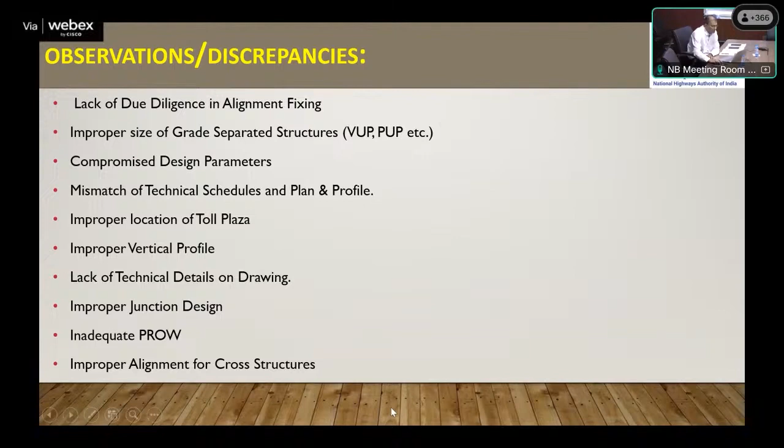Then improper alignments for cross structures. The cross structures which are being proposed are not at the desired or advantageous location. Sometimes they are proposed slightly away at some other location as per the convenience of designing or planning, or due to some other reason. So then the purpose gets a little bit defeated in terms of flow of traffic, flow of water, or even the other utility which may be there for the structure.

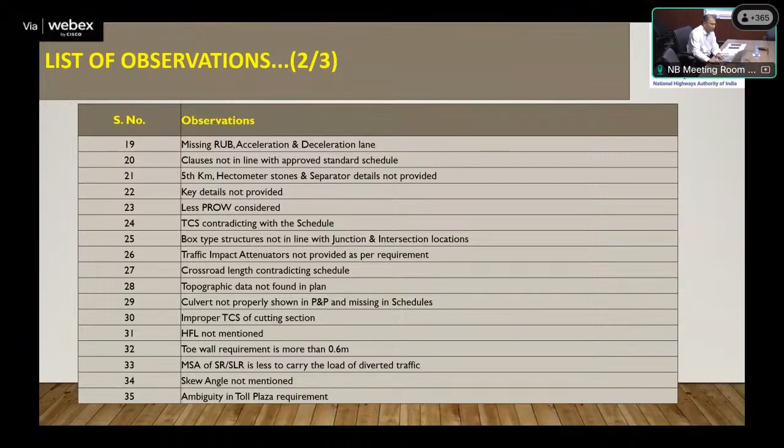So these are the various types of observations which we have already categorized into broader classifications. I will not go into this one by one. Instead, I will try to illustrate it with the help of images, documents and other things in pictorial or illustrative way, so that it will be better for your appreciation.

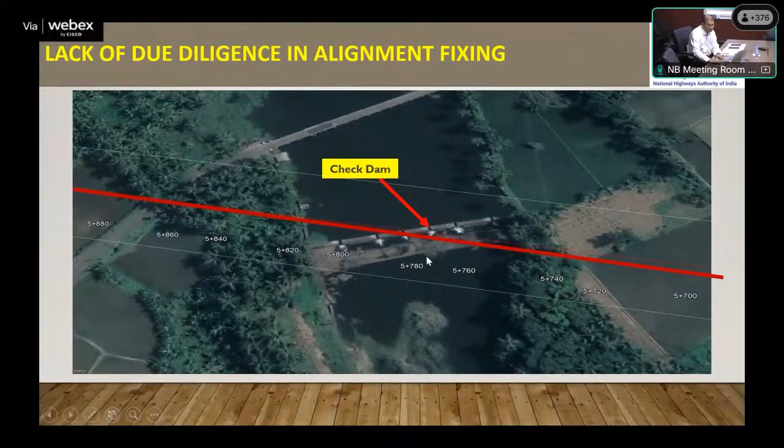This is entirely a casual approach of fixing the alignment, and the same is shown here in the drawing. This is the check dam, and it was very much in the knowledge of the planning DPR consultant. What he has done is taken this arrangement of the pier as a portal pier, with this isolated foundation.

They have split the foundation to protect or avoid the structure, but this may not be sufficient because the structure is of concrete and may be having a larger bottom width. So it may not be sufficient. This distance may not be sufficient to take care of the foundation and other existing details of the structure, and without damaging or causing interference to the existing structure, it may not be possible to execute the proposed structure.

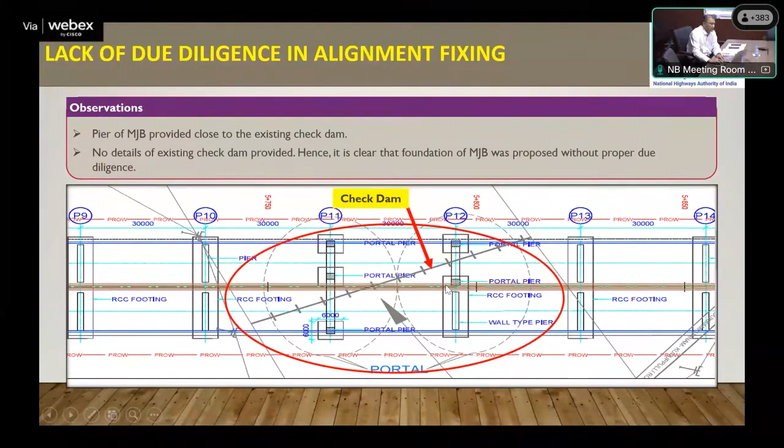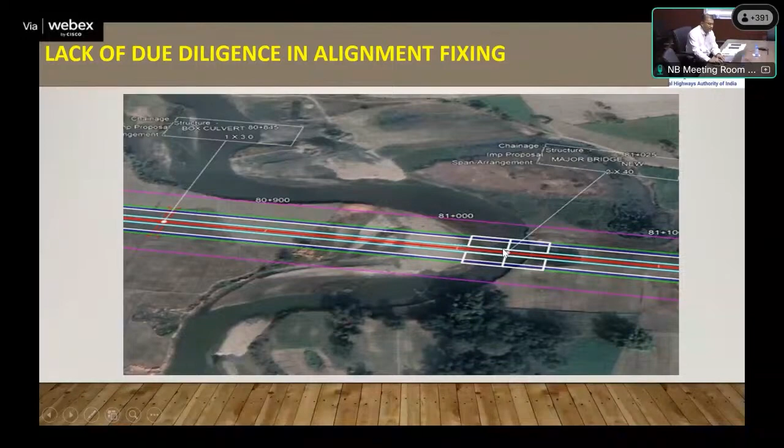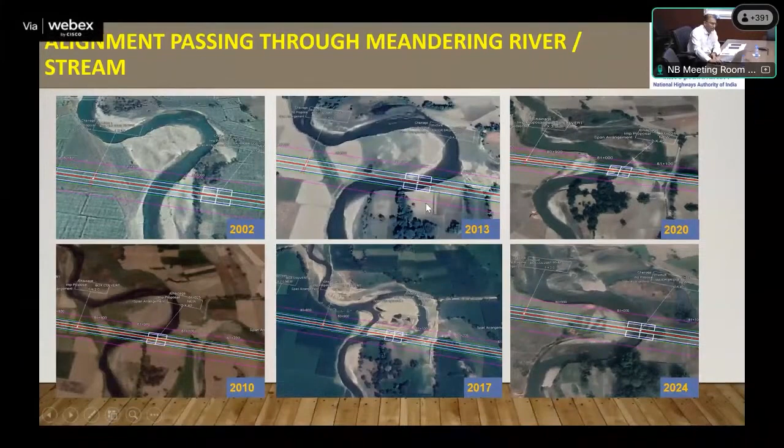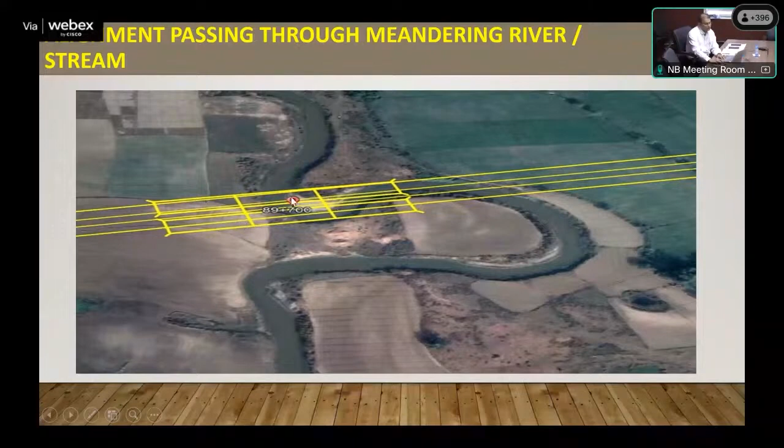So if we are constructing a bridge here, the river course will go on changing and it will get shifted. So the bridge at this location may not be adequate, desirable or sufficient to take care of the waterway requirements.

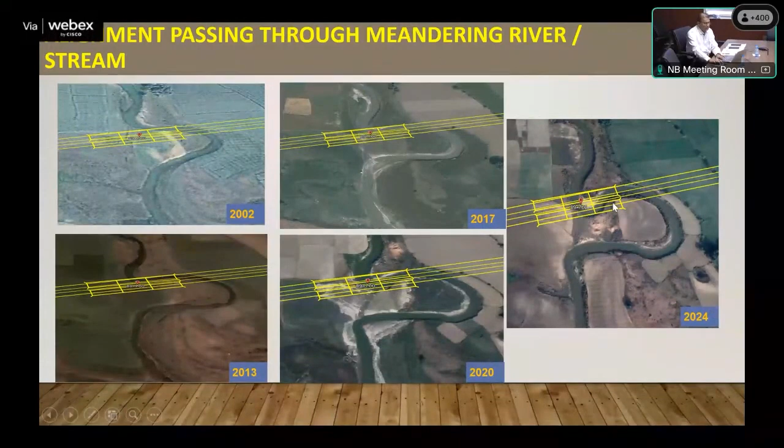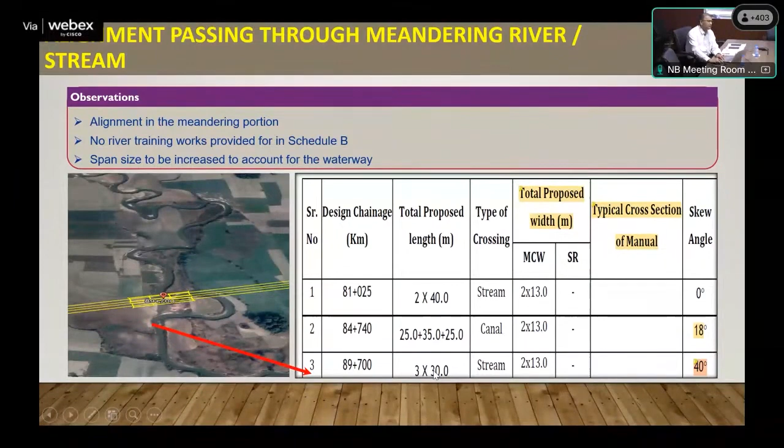So this is the detail of that three of 30-meter span. That is the bridge, it's a major bridge, 30-meter three spans. So you can make out how much a major bridge is being compromised for the location.

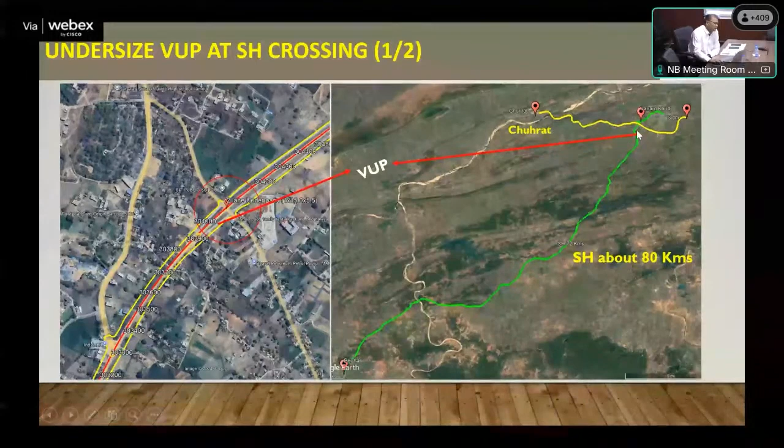Then undersized VUP and PUP - many occasions, this is one example where the state highway is crossing our alignment. This is the SH and this is the proposed NH. So this is the VUP location. And if you can see, the size of the VUP is not adequate to take care of the volume of the state highway. So this is not being taken care of.

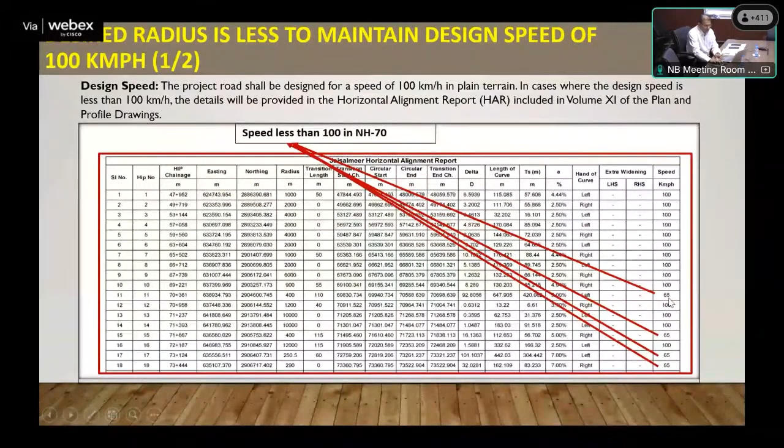Then the radius for the design speed - the entire section has been said to be designed for 100 kmph. That is the design speed required. But in the table itself, if you see, in many places it is being compromised, the design speed is kept as 65, which is not as per the requirement. And this is because of this inferior curve, the location of the curve is not adequate. So because of the curve limitations, this is being compromised.

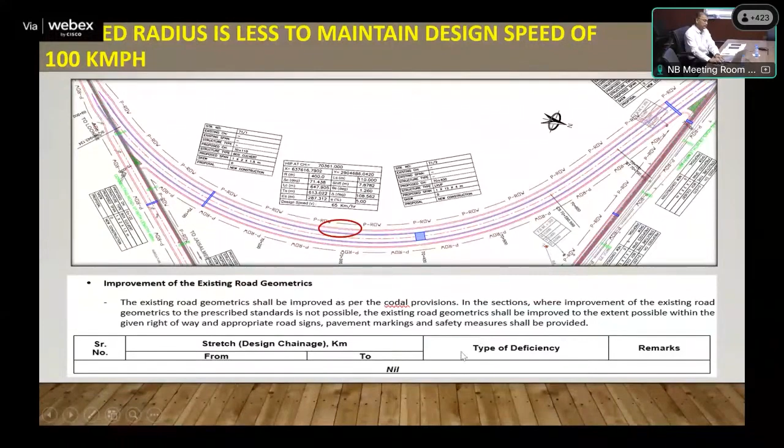Moreover, the deviations and deficiencies which are to be highlighted and specifically mentioned - if some certain constraints are there which cannot be fulfilled or overcome to fulfill the design requirement, then it should be clearly mentioned where we are compromising with the design requirement or design norms. But in the table it says nil, meaning everything is as per design norms and standards, whereas the fact is contrary.

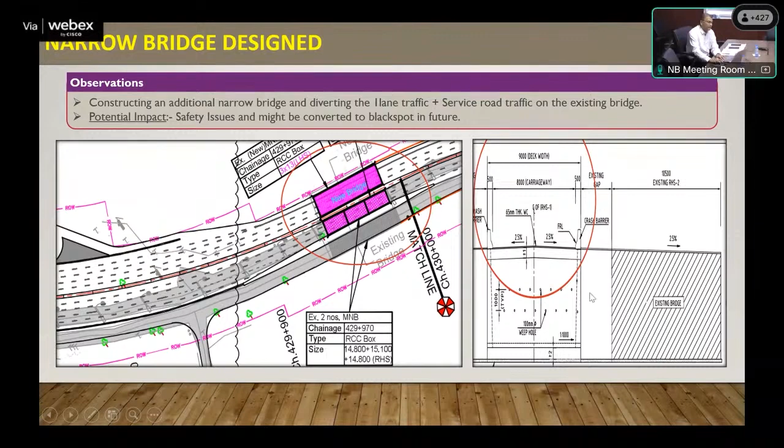This is again one of the narrow bridge construction issues where the bridge is not up to the requirement, and then the bridge will not serve the purpose. This is a minor bridge requirement, and this is the extension of the existing bridge. So that is not being built as per the existing waterway.

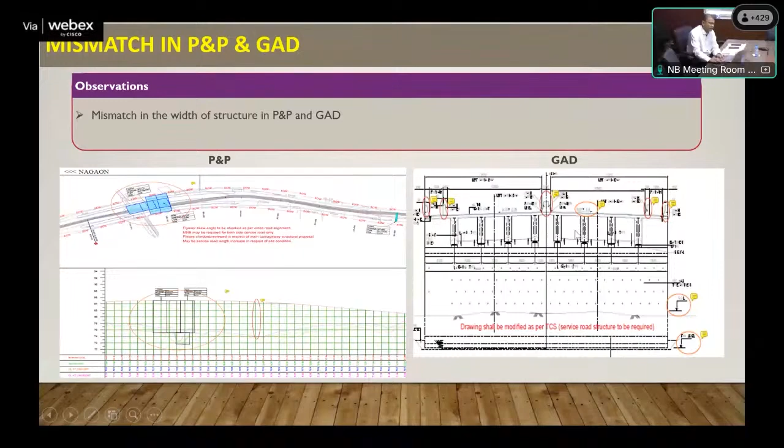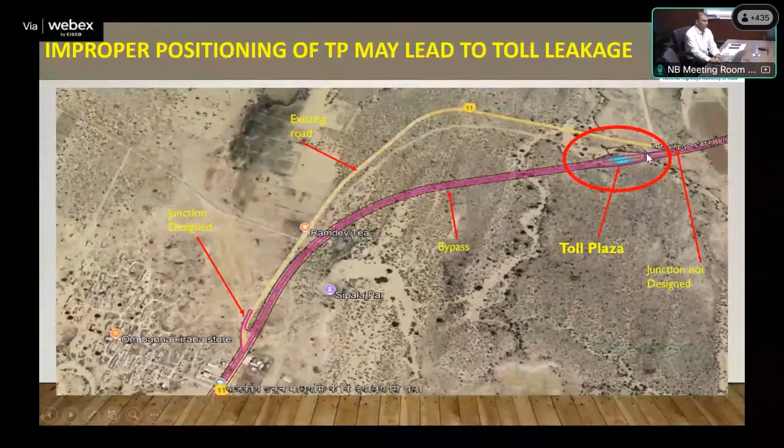The short loop is available to bypass the traffic and avoid the toll plaza. In this same drawing, it shows the existing and proposed location of the widening of the project and new alignment, realignment portion. Here is the toll plaza, and there is one structure also. If you see, there is a structure, there is a nala which is flowing like this, and then there is a structure.

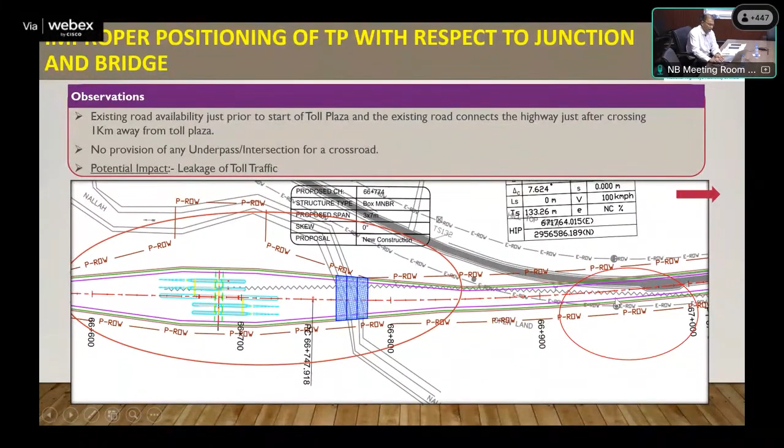So that structure is also there, which falls on this taper portion. And one more thing, this junction is very close to the taper portion of the toll plaza. So from the safety point of view also, this intersection development is undesirable because of the free flow of traffic on the toll plaza that is envisaged. It will unnecessarily create congestion and obstruction to the free flow at the toll plaza.

These are the ambiguities in the typical cross sections which are there. See, it is a high bank where the slope protection has been mentioned, but the detailing and other things are not properly done. In such a high bank, this should be done very properly, and the method of protection and the structures required, and the measures to be taken up for slope protection, should be clearly brought out, whereas the same has not been done here.

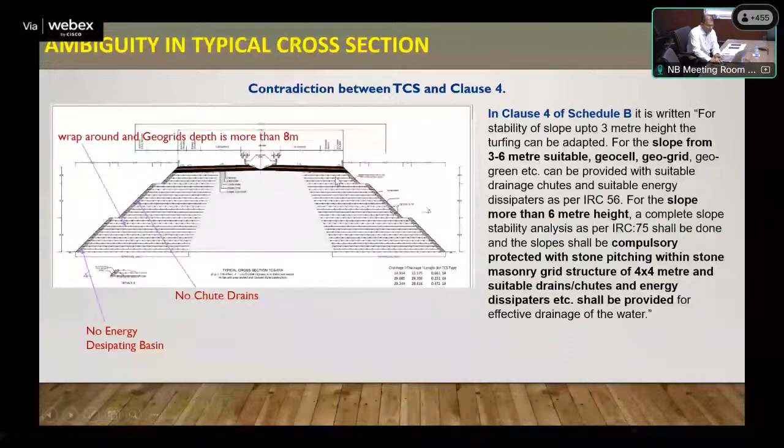Another ambiguity in the typical cross section, you can see here, this is the open drain, which is shown as a concrete drain, but the cover has not been shown. Mostly these typical cross sections, which are provided in the Schedule B, are referred to very often, and they are referred to for any litigation also, causing litigation. This has not been shown in the typical cross section, so why should it be provided? And at many places in the document, the typical cross sections are referred to.

This creates potential for litigation if every detail is not mentioned. If details cannot be shown on a typical cross section, sufficient notes and elaborative footnotes should be provided, stating that these parts are not covered in the typical cross section but are to be provided as per the norms and relevant IRC codes and other documents.

Here, the top of the paved shoulder is also matching the top of the open drain, and there is no protection for safety; a safety barrier or separator has not been provided.

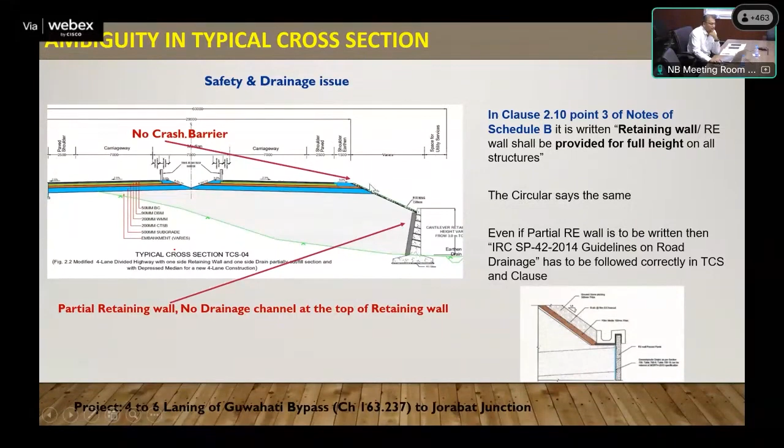Similarly, here this is a high bank where a partial height retaining wall is provided, but the drainage arrangement and other details that should be done at the top of the wall, to take care of drainage from the slope and seepage water, have not been properly taken care of or elaborated. Since it's a high bank, a protective crash barrier should definitely be provided, but that has not been shown.

This is also one of that type of typical cross section with a partial RE wall and drainage issue. When a partial RE wall is provided, it should be very much detailed, as there are restrictions and constraints on providing a partial RE wall, and there are guidelines on that which should be taken care of.

And then the structure which has been shown is not properly shown; it is not taking care of the detailing.

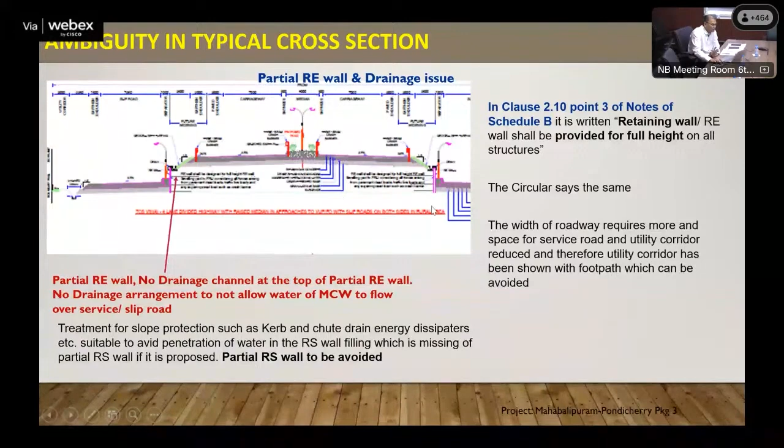Skew angle is missing at many places. The drawing shown in the plan and profile indicates the crossing or road or structure is not square, but at an angle, a skew angle. But this skew angle is not mentioned in the plan and profile, and similarly it is not shown in the schedule and other parts wherever details are required.

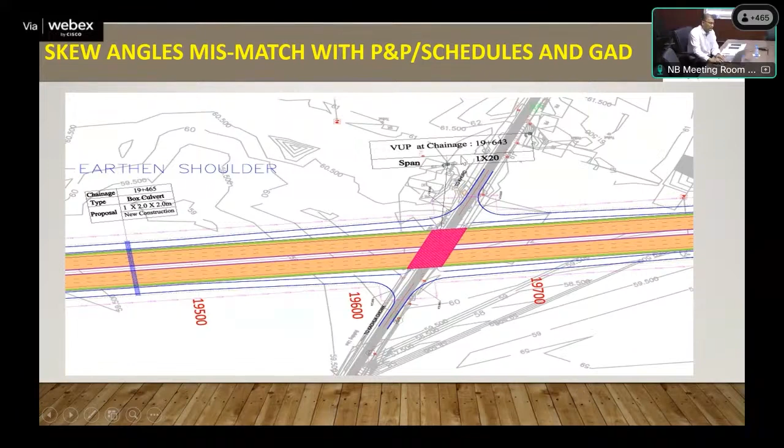See here, at this same location, the skew angle is mentioned on the contrary as 0. This will unnecessarily create a dispute, because when you say 0, all the spans and other arrangements will be treated as square or skew, which will be to the fancy and advantage of the agency or interpreter.

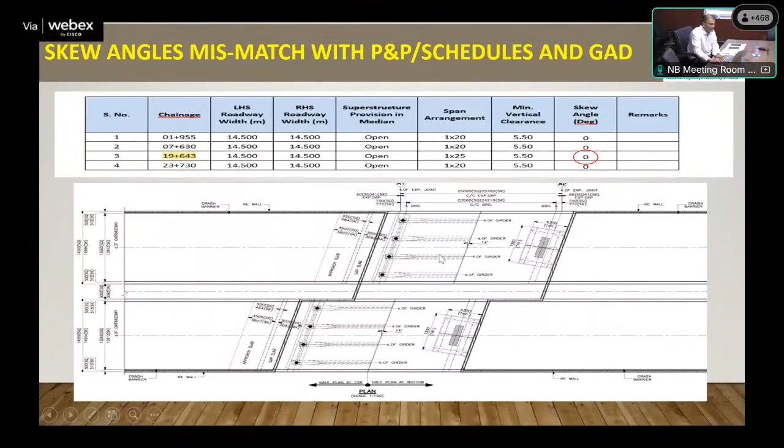So at what advantage he wants to interpret the opening, in terms of a square or skew opening. And here also, in the GAD, the plan shows it as skew, but the skew angle has not been shown properly.

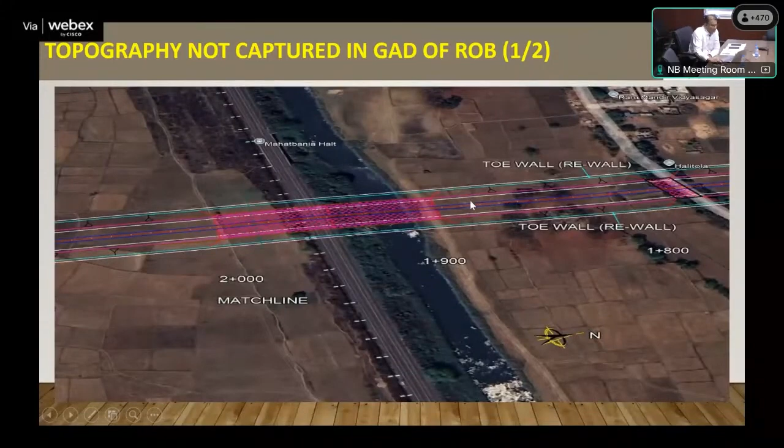Regarding topography, if you see the image of the location, there is a railway line, a track, and some water body. This water body should be taken care of in the spanning arrangement, which spans the railway track as well as the water body.

But if you see on the next slide, the arrangement shows that the water body or existing topography is not taken care of, and that has not been mentioned in this bowstring type ROB. This is an ROB girder, and the GAD and other things are not taking care of the total field requirements; it is not as per the actual conditions of the field.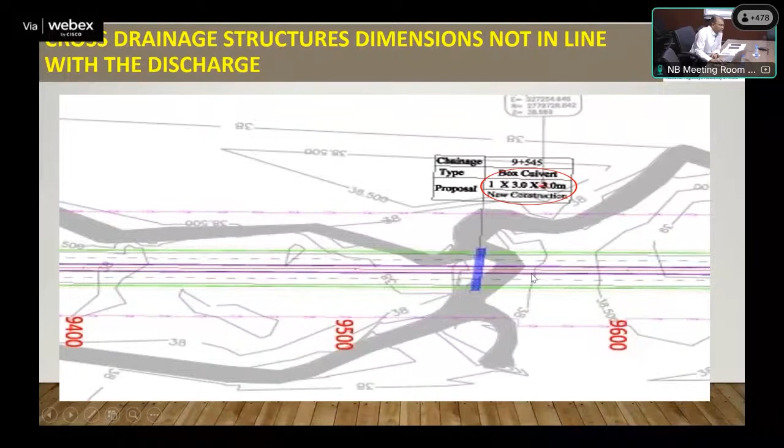HFL is a missing parameter, which is very essential in case of river bridges or water body bridges, cross drainage structures, particularly major bridges and important river bridges. That has not been mentioned in the drawing or in the relevant places wherever the schedule is mentioned. This is a very important feature that has to be there. It's historical data which is to be collected from various sources and departments which are accountable and maintaining the data. That requires field work and coordination with the concerned departments. If it is not done, then the field HFL may not be marked. And if HFL is not marked, on what basis the opening or waterway of the bridge is being decided or proposed cannot be confirmed or ascertained, whether it is correct, adequate, or just arbitrarily fixed.

This is a mismatch between two documents within the technical documents of the project, the plan and profile, and the schedules. The plan and profile shows a box minor bridge, and the schedule shows animal underpass. You see it is mentioned as animal underpass, but in the plan and profile, the structure detail box or call-out box, which shows the details of the structure, is written as box type minor bridge, whereas it is an animal underpass. For animal underpass, it may have some different requirement, and this is something different.

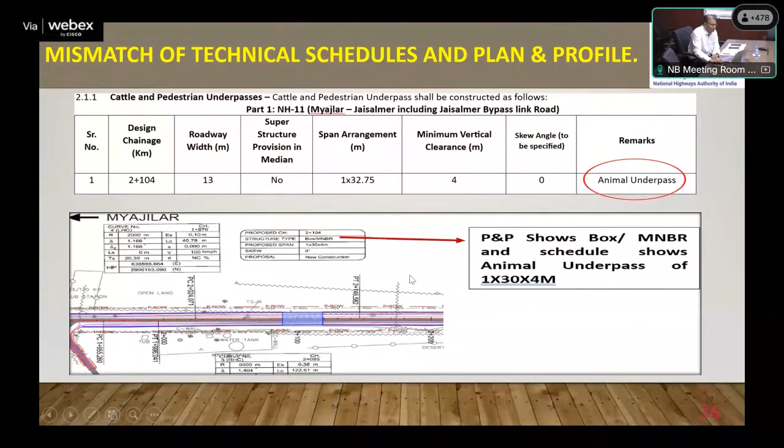Alignment of the cross structures, as we have seen earlier in case of skew structures, particularly crossroads - similarly here, in case of water bodies, canal, river streams or nala, if this type of structure is provided at a square angle with some river training or nala training work, it can be diverted and connected. But if it is provided like this, say in a canal, the canal authority may not accept this because of head loss due to the right angle bend. So they may raise objections subsequently when approval of the GAD is sought from the concerned canal authorities or department. So this type of planning and initial provision should be avoided to make minimum disturbance to the existing utility or facility. We have to provide the future or proposed structure in such a way that it causes minimum disturbance to the utility, so that the time taken for approval of such GAD and proposals by the respective department will be minimized, and they will have less resistance to approve such structure or drawing, which takes care of their requirements.

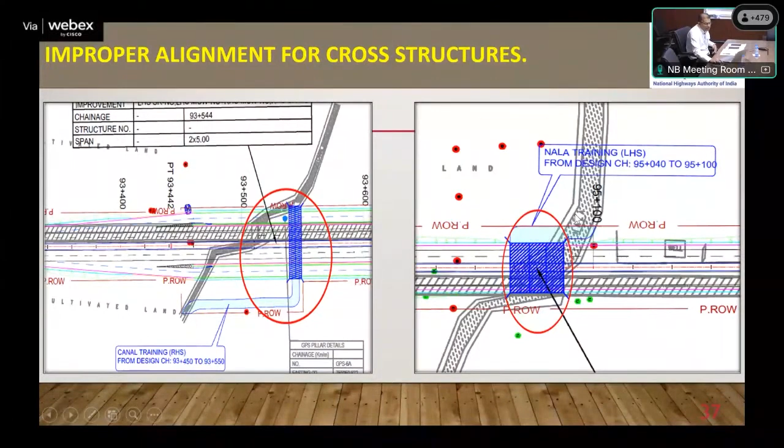Similarly, here, this is a nala, but you see the span and then the opening is somewhere here, and then nothing has been said about this - whatever portion this waterway is here, the opening will be here down or upstream side, whatever it may be. But at one side, it is just going close to the existing stream, and on the other side, it is not getting connected. So it will definitely require channelization and training work for the nala, and certain diversion for the nala.

The deviations which are there from the standard provisions, they are to be particularly brought out clearly in the document at the appropriate place, at appropriate schedules, wherever the norms are in deviation from the standard norms, in case of vertical clearance or horizontal clearance or other.

Particularly in case of animal underpasses, they are provided as per the requirement and insistence of the forest department to take care of the wildlife requirement, depending on the animal corridor for which the underpass is being provided - may it be tiger, elephant, or whatever local wildlife is predominantly available over there. So depending on that type of corridor, they ask for the opening and the vertical and horizontal clearance. That is specific for the purpose, and that will be in deviation from the standard. So that has to be taken care of.

And this detailing, if you see, the details are not sufficient, and the complete details as per the other structures, as per practice and as per the sample schedules provided for other structures - because these animal underpasses are also structures, just like other cross structures - their complete details are required to avoid any confusion or controversy or dispute at a later stage.

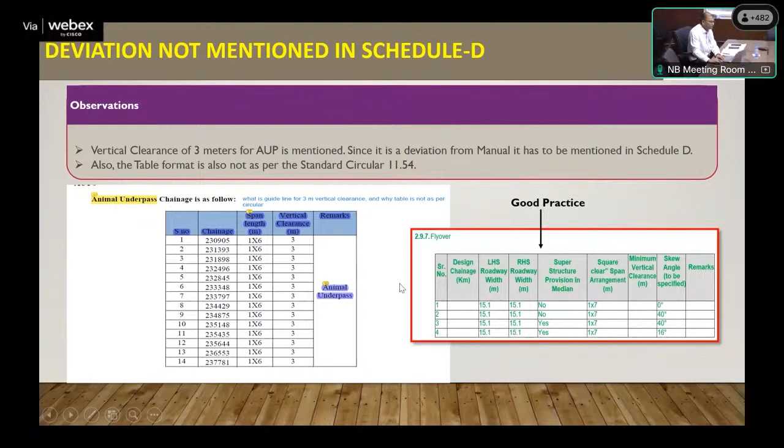Here again, this is a hill type road where the cutting and filling portion, this widening and proposed development, is shown in that way, with a considerable slope, where the drain and other details and slope protection has just been shown. But the complete detailing - what type of slope to retain such a huge slope, and to take care of safety of this type of slope - on top a retaining wall has been mentioned. So why this retaining wall has been mentioned, and what it has to do, for what purpose it is being provided, and what protection this type of slope requires - detailing of that protection should be provided, because the quantity and requirement will be considerable.

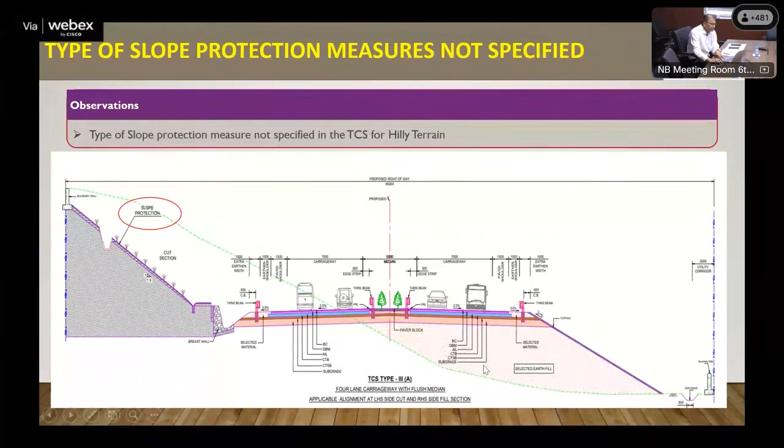Now on a similar hillside road, this line is perhaps or presumably showing the existing ground line. So for that purpose, here they have shown filling, and this portion should be in the cutting. So if it is the existing slope, then it is in the cutting, and then again that slope protection has been shown on that side. The slope protection detailing is missing, and the other thing is the existing road - see, it has been shown here. So how can it be shown within the slope, the natural ground slope? So there is some slip in showing the existing details, and this type of slippage also is not welcome.

This is one of the copy-paste errors, perhaps because the information and other details are entirely different. The TCS which was shown for a stretch or section has no relevance with the project. So this is actually not pertaining to the project where it is pasted or provided, because the details do not match with the requirement of the project.

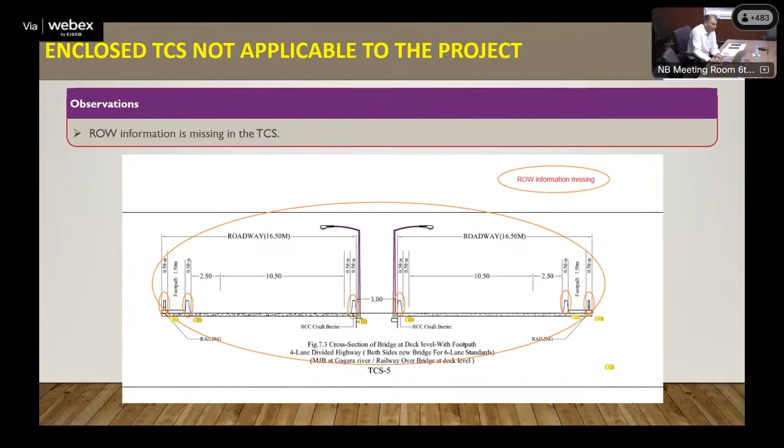Ambiguity in project start and end chainages. Sometimes the start chainage and end chainage do not get correlated. Here, if you see, the project start and end kilometer are shown in the name and nomenclature and other details. The project is shown to be started at kilometer 14, and the end of the project is said to be at 22.070, whereas in the plan and profile, it starts at 14.620 and ends at 21.550. So at both ends, the plan and profile is not taking care of the entire section.

So in the schedule also, if you see this and the plan and profile, this is what the location is. So approximately more than 600 meters of plan and profile is missing. This will create huge litigation afterwards if the TCS is not mentioned or the plan and profile is not taking care of that. Then the length itself of the project will get questioned, from what end to what end the project is to be constructed. The total length of the project will come into dispute.

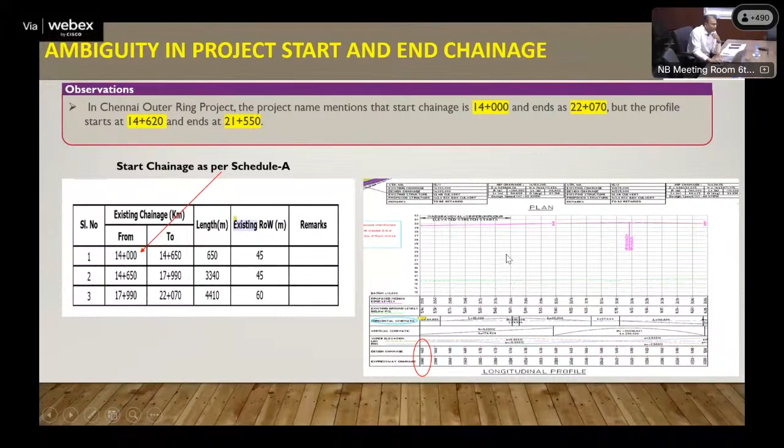Plan and profile not as per the schedule. This is again the same problem. The drawings are prepared perhaps by some other technical persons, and somebody has to coordinate between them, and the detailing done in the form of tables and other documents in the schedules, both should correlate.

Mostly the drawings are prepared as per the site conditions and survey and other details, and the tables and schedules are prepared on the basis of the drawings and field surveys and requirements. But whatever is done, whether the drawings are prepared from the tabulated details or the tabulated details are prepared from the drawing, they should get correlated and both should match the field requirements and field conditions. If that is not done, then priority of documents and other issues arise, and that type of disputes occur at the time of implementation and execution, causing unnecessary delay in the project.

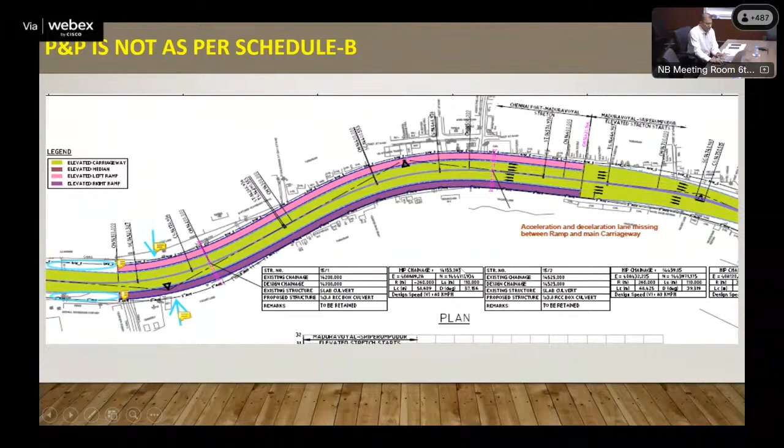Here, this is the elevated portion, and these are the ramps shown in violet and purple color. These ramps get merged into the elevated structure portion. If you see the ambiguity depicted here, the width of the structures is not matching with the width mentioned in the documents. If you add up the width, the total width which is required and should be correctly mentioned is not there. There is ambiguity in the width of the ramp portions and the main carriageway. This is the elevated portion.

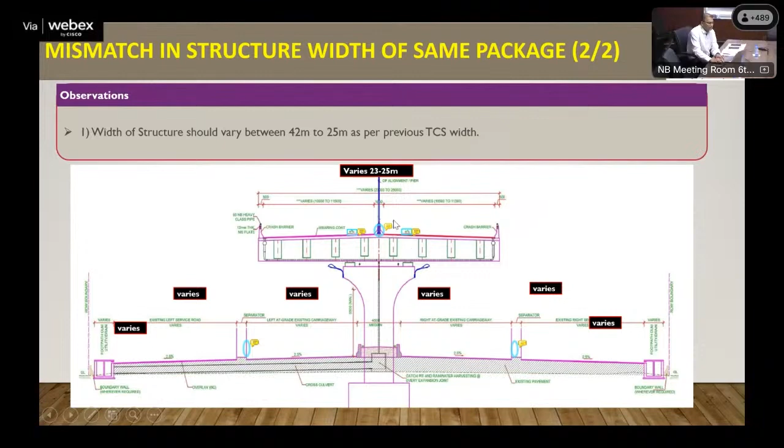The same has been shown with the width of the structure varying from 42 to 25, but it varies from 23 to 25 in the cross sections which are shown. So that is the ambiguity between the two documents. It should get correlated, and this width is not properly shown and is not adequate.

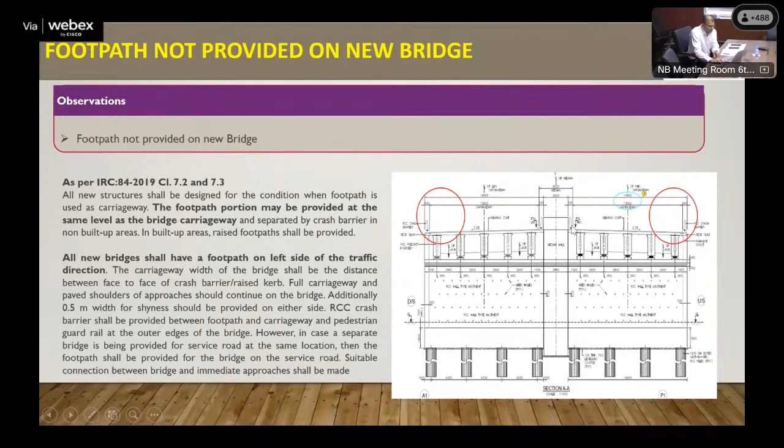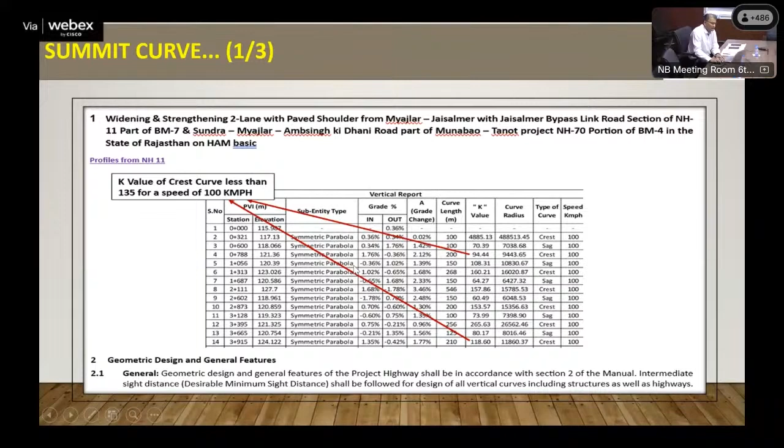This is one similar case where the vertical summit curve or vertical profile is not proper, and this is a compromise with the profile and the gradient. If you see, the summit curve length is provided as 200 meters, whereas it should have been 285 meters. Here is the profile, and this curve, and this profile is to be according to ISD. Most probably that is being compromised and it is not being provided as per the ISD.

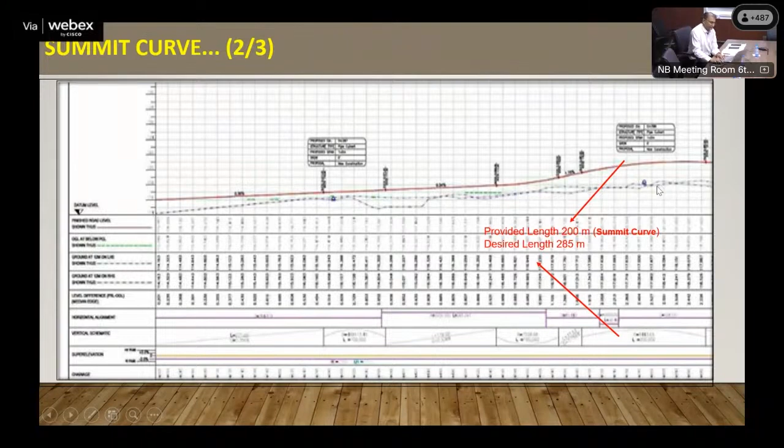Again, this is the case of inadequate summit curve, inadequate vertical profiling. Inadequate length of the summit curve will result in compromise in the ISD, or it will result in inadequate sight distance.

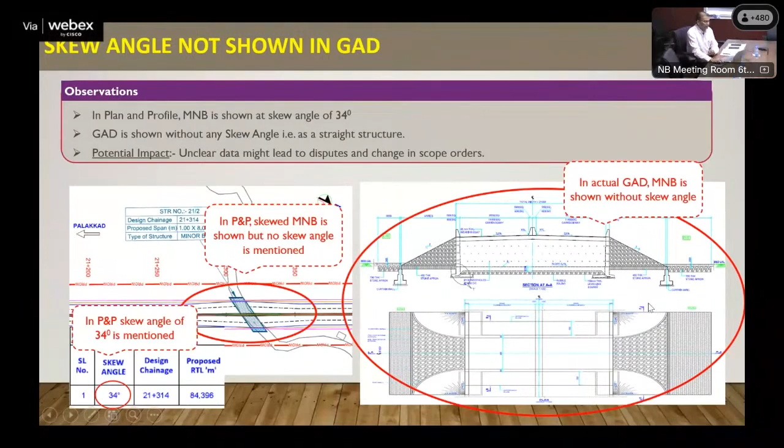These are the cases of alignment of underpasses, similar to earlier cases where the crossroad is there and the alignment is not proper, and that has not been provided considering the free flow of traffic. One sketch earlier was there, and this alignment and skew of that minor bridge cum VUP is a combined structure, which again is not properly aligned with the detailing and other details shown here. So that has to be taken care of.

And then the width of the structure is not shown properly. If you see, the 2 into 11.6 proposed width of the structure is not taking care of the total requirement.

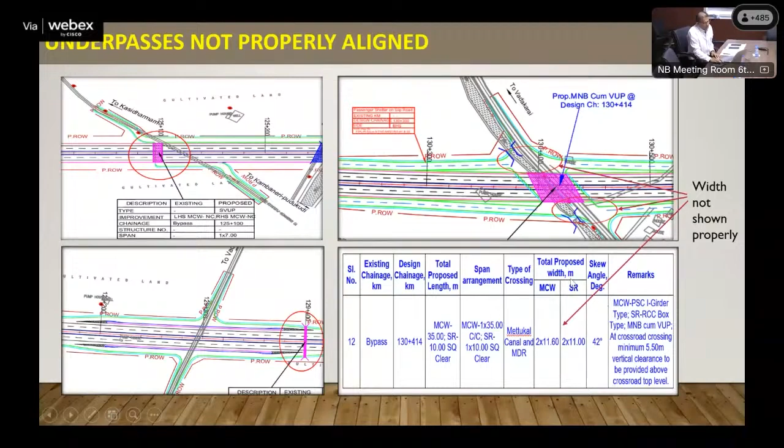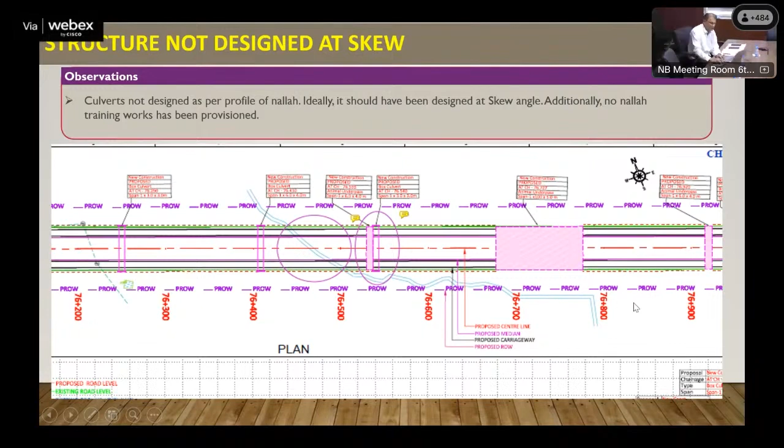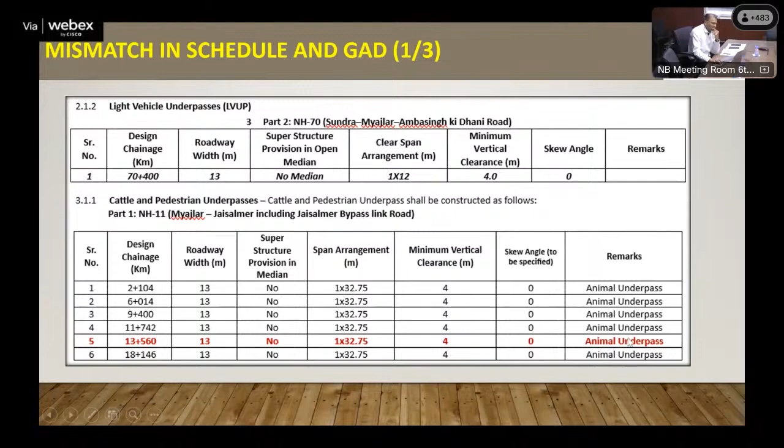See, mismatch in this again. The structure mentioned is an animal underpass, whereas the other location shown is a different way.

As per GAD, the structure is shown like this, and as per manual the width required is more than the existing lane, and footpath is missing. No footpath is there, which is a mandatory part. There should be a footpath on the LHS side of the main carriageway. If it is a divided carriageway with a separate distinct part, then at least the footpath should be provided on the LHS side.

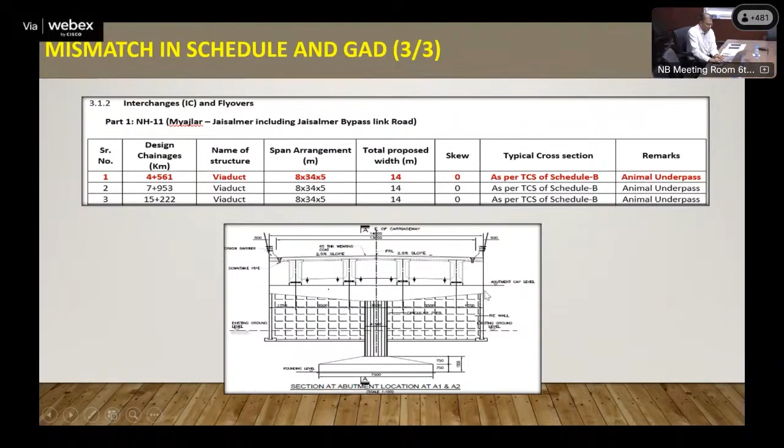Again, this is what we had shown you earlier. This is a viaduct, and as per TCS this is shown as an animal underpass. Span arrangement is again not matching. This is the flow pattern again.

Sorry, this is a road intersection, a complex type with four or five roads coming from different directions and meeting at this junction. The structure has to be provided somewhere here, but it is lacking channelization and detailing of the junction and structure. It should be very properly designed and detailing should be provided - what type of channelization, traffic island, and channelization provisions are being provided for the slip roads, for the structure, for the grade separated portion - that has not been provided.

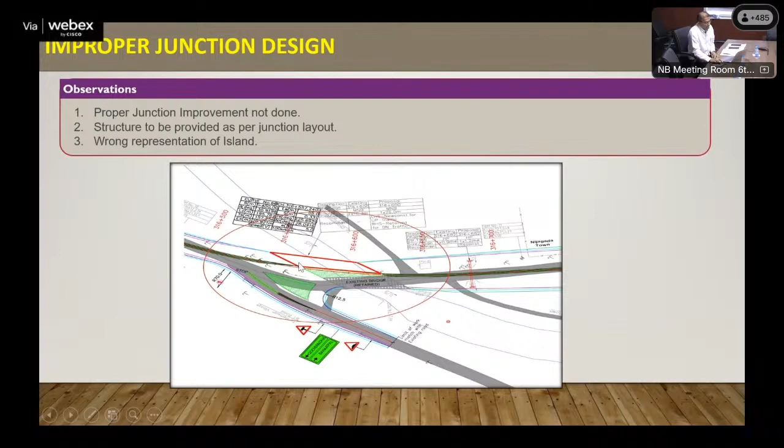Again, inadequate size of the VOP - the size is not as per the crossroad requirement. This is the highway portion, this is the crossroad, and the proposed span size is not adequate to take care of the carriageway width of the crossroad.

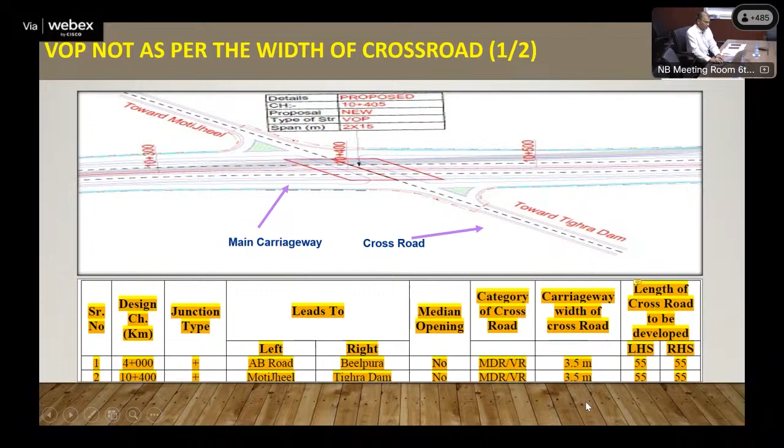Again, the cross sections and the opening of the overpass is not adequate and not as per the crossroad width.

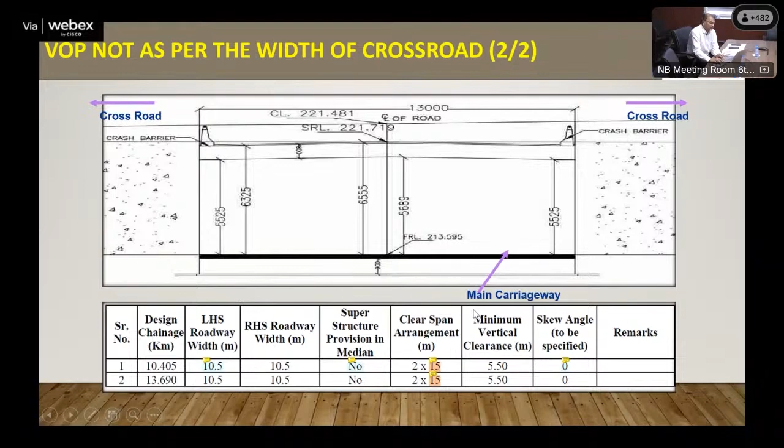Again, here if we see the detailing of the acceleration and deceleration required for the crossroad, that has not been done.

This is about the ROW requirement. If you see, the ROW requirement will be more if this is the rotary or grade separated plus rotary type of at-grade junction development below the grade separated portion.

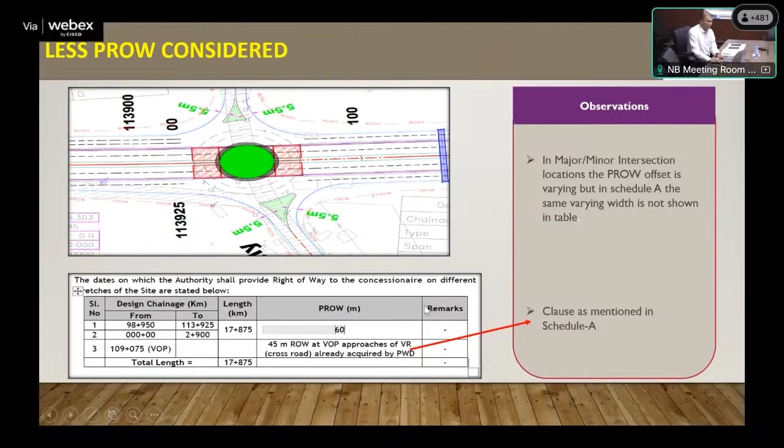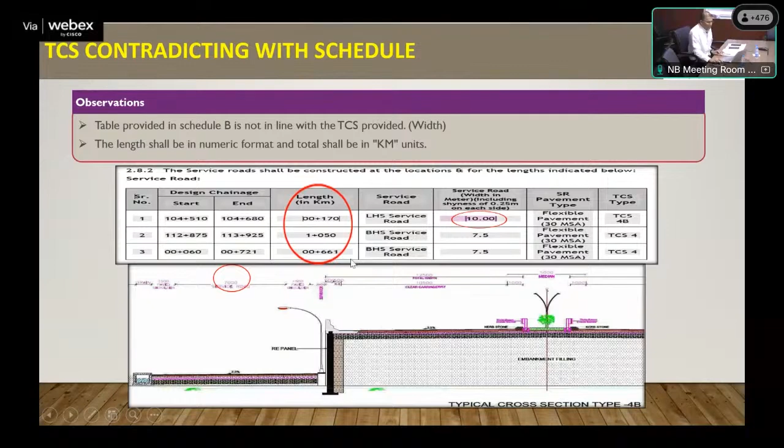If you see the length is shown in kilometer, but here it is not shown properly. It is shown in 00 plus 170, meaning plus stands for decimal. It is taken that way and shown in kilometer. So the length is not shown in the proper way, and the unit is not taken care of.

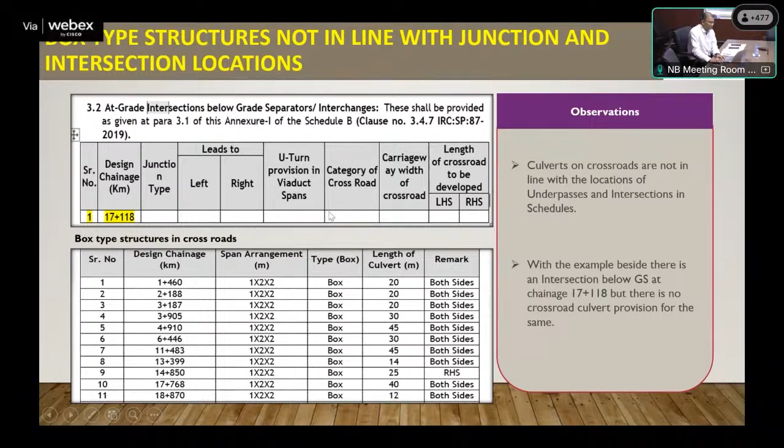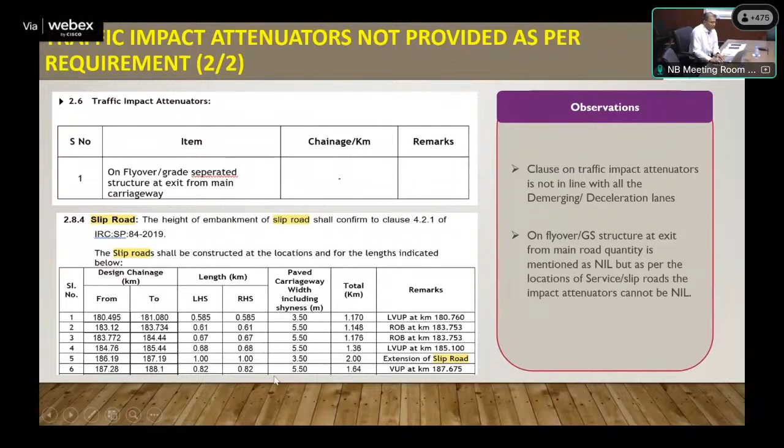So this is again slip road. This is extension of slip road, which is not clearly mentioned in the schedule regarding tapering and this. I will just go through the text part because illustration may be more useful.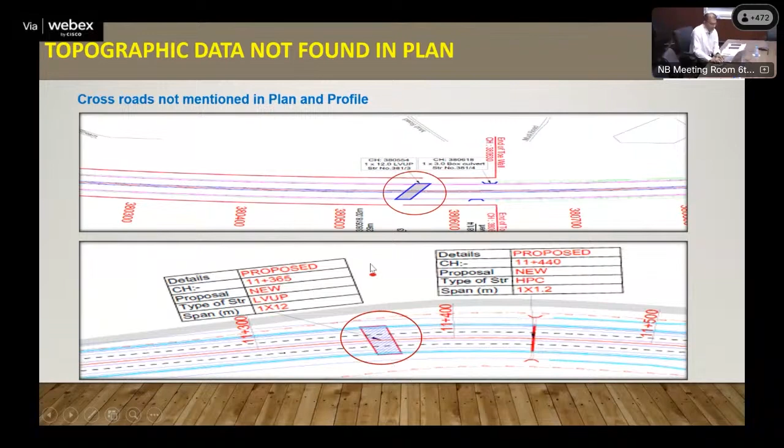Crossroad not mentioned. Here, if you see, a structure is provided. Here, the structures are provided, and the call out box is also there, which says LVUP. Here you see it showing LVUP, but there is no crossroad shown here. So the structure has been provided as LVUP in the plan and profile, but the crossroad and the pattern of road is not there. It is missing.

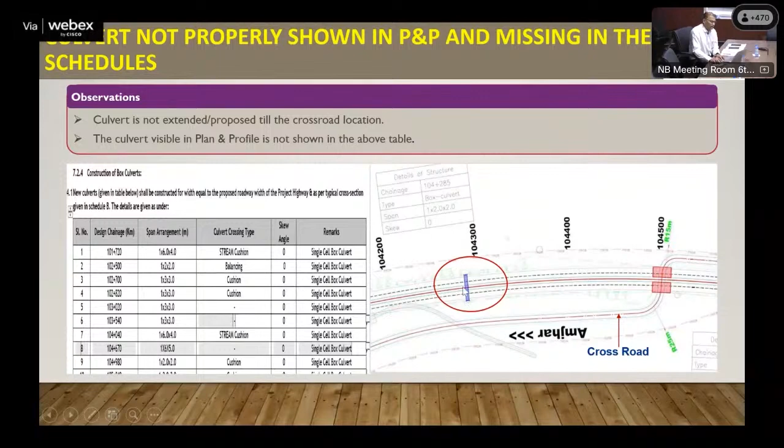Similarly, here the structure is not properly correlating with the details, with the schedules which are shown, and the plan and profile which is shown. And then the width of the structure as per the requirement of the site conditions - this has to be below the crossroad also.

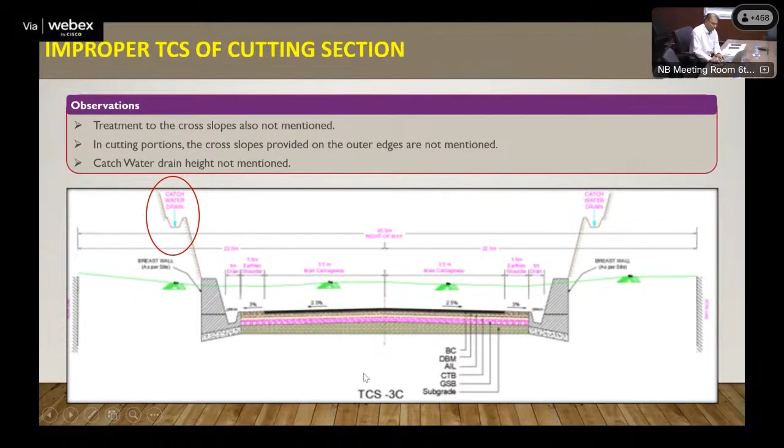In the cutting also, as I've shown earlier, this detailing of the slope protection and other things. Then the catch water detail has simply been arbitrarily shown without the details and other protection, even though it shows to be a deep cutting, and the highway is in deep cutting, so that has not been taken care of.

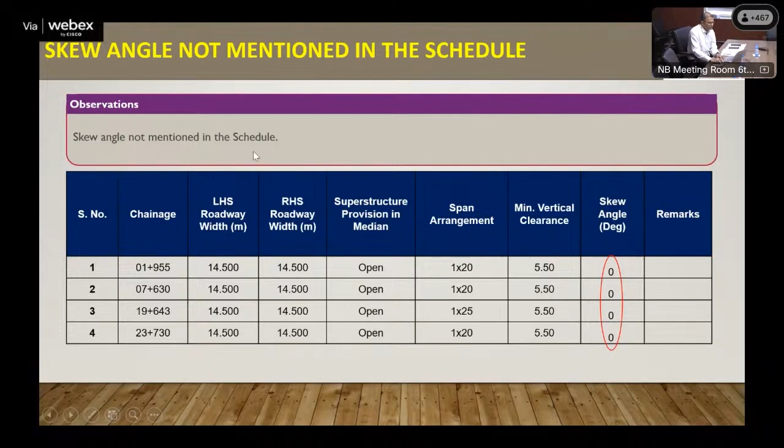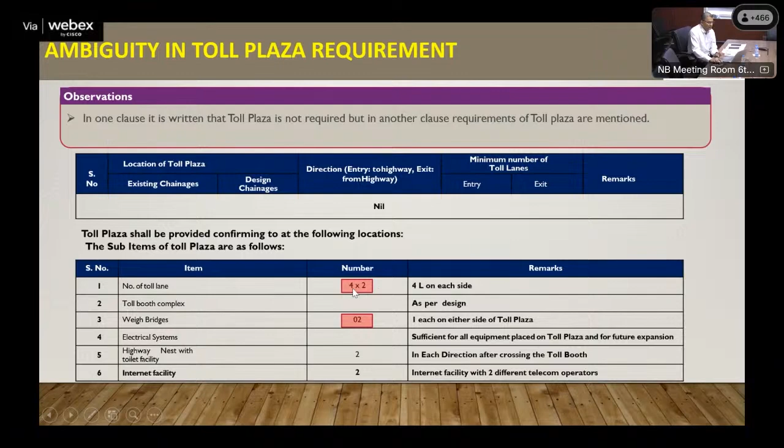Number of toll plaza - see here the number of toll plaza, and toll is required. Toll plaza is required. Whereas in the other detail, other location, it is shown as nil. So that means there is no toll plaza, whereas this number of lanes and toll plaza is to be provided. That has been mentioned in the other place.

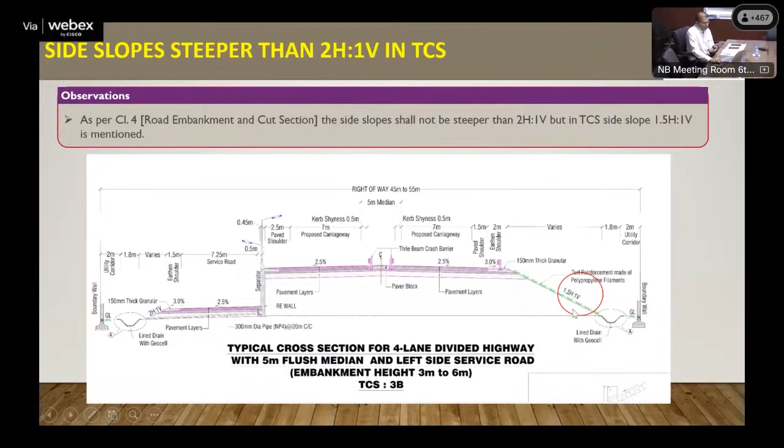Slope - this is the slope, and the slope is provided as 1.5 horizontal to 1 vertical. This is steeper than the 2 horizontal to 1 vertical which is required. So it is steeper than that, and this is compromising with the norms.

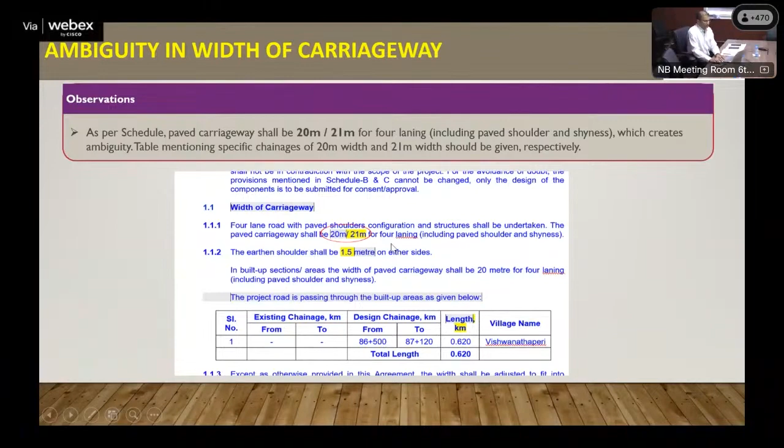Again, this is one of the ambiguities which may lead to litigations at later stages. The carriageway width has been shown as 20 meter oblique 21 meter without giving the specific section or length or kilometer-wise, location-wise detail. So this 21 and 20 meter, it can be one or the other - it should be very specifically and clearly mentioned as per the standard typical cross sections.

We can adopt these actionable points which can ensure better quality of the DPR. Strict adherence to the policy circulars, model documents, and standard guidelines should be carefully referred to, and they should be adopted and followed in the preparation of the documents.

Expert advice should be part of the process from the initial stage of DPR preparation. The concerned field experts who are capable of delivering to the requirement of the work should be consulted, and they should be involved in the initial stage and throughout the process of DPR preparation.

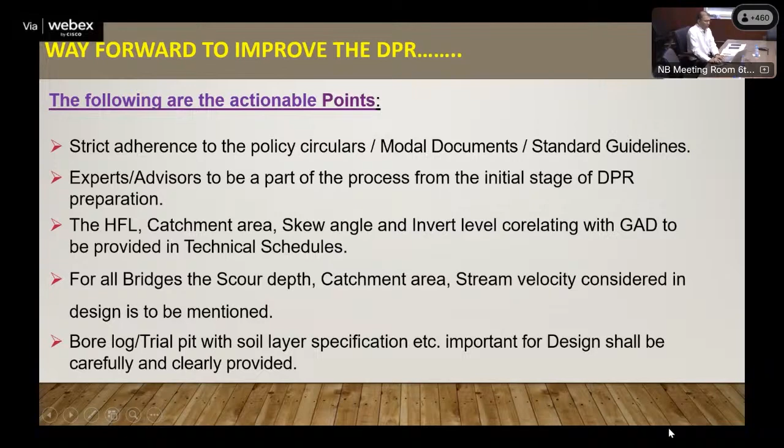All bridges - scour depth, catchment area, stream velocity - complete hydrological data should be provided for all water bridges and river bridges. Bore log, trial pit, and soil layer specification is to be provided; it is a very important parameter for design and data. Most of the time these are missing - bore logs and trial pit details are not provided in most DPR documents.

For the actual ground/river cross section profile, GAD of the bridge is to be prepared in natural scale. ROB/RUB key plan to be prepared showing exact chainage of both NH and railway, because NH and railway have their own different chainages. Both should be provided correctly with field details and collection of actual crossing points at the field, so that both authorities can correlate to the same structure.

So any confusion regarding the location of the structure does not arise. Vertical geometry design of the ISD, SSD is to be done, and ISD is to be provided.

If under unavoidable circumstances SSD is used for providing the vertical profile, then it should be clearly mentioned as a deviation in the technical schedules. The skew angles in plan and profile and other places are to be clearly mentioned - all documents, wherever skew structures are there, should be provided with the skew angle.

Utility relocation plan shall be provided clearly, showing the locations of existing utility as well as proposed utility. Most utility relocation plans sometimes miss either of the details - proposed or existing. Both should be provided: where the existing one is there and where it is to be shifted.

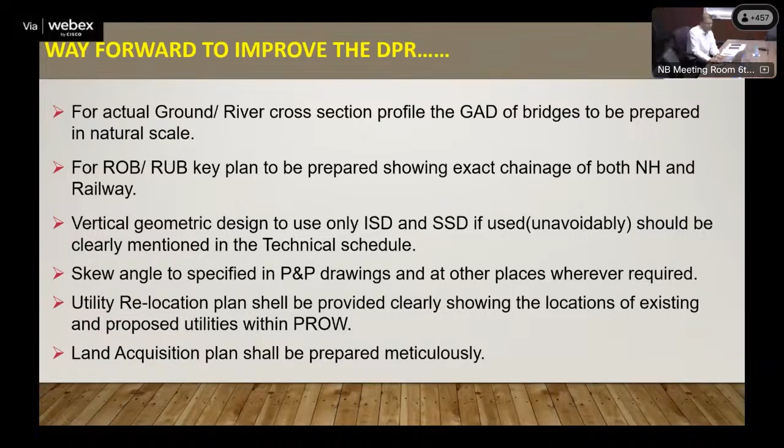Land acquisition plan - the first and foremost thing. Land acquisition and land requirement for any project to be taken up, executed, and implemented hindrance-free, land is the prime requirement. So if that land acquisition plan is made efficiently and correctly, then the acquisition will be done correctly and land availability at the time of commencement of work will be proper. Additional land requirement will not be there.

There is mandatory training of DPR professionals as per MoRTH circular issued on 7th April 2025, which is a reiteration of the earlier circular specifying minimum 7 days training at IAHE required for personnel and professionals engaged in DPR activity. It has a very nominal fee - 30,000 with GST, so about 34,000, within 35,000 only. So you have to start nominating your DPR professionals who are being engaged for preparation of DPR for IAHE training.

For cattle shelter, we have issued a policy circular on 25th February 2025 this year, which includes provision of the TOR in the schedule of the DPR consultant.

So the DPR consultant has to provide for the cattle shelter location also, as per the wayside amenity or other things which are being done by AI-MC and design. This is another circular which has been issued by the design cell.

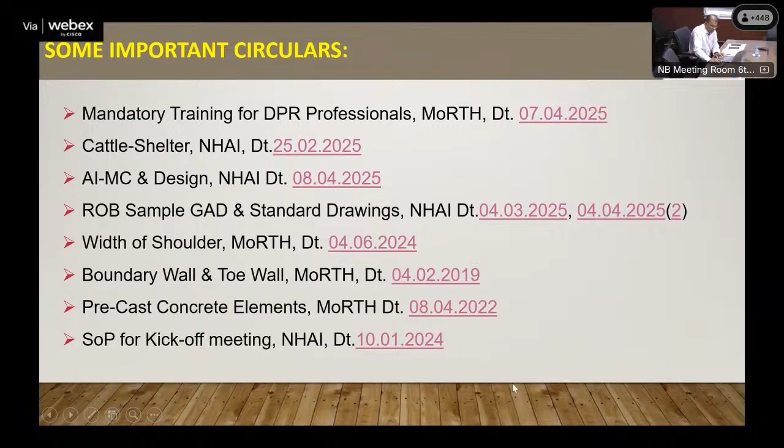Thanks, that's all from my side. With the quote from Alexander Graham Bell, I would like to end this. He said that before anything else, preparation is the key to success. So let us take some motivation from that quote and try to prepare more quality and good DPRs, so that the project can also be implemented in a good and qualitative way. Thank you.